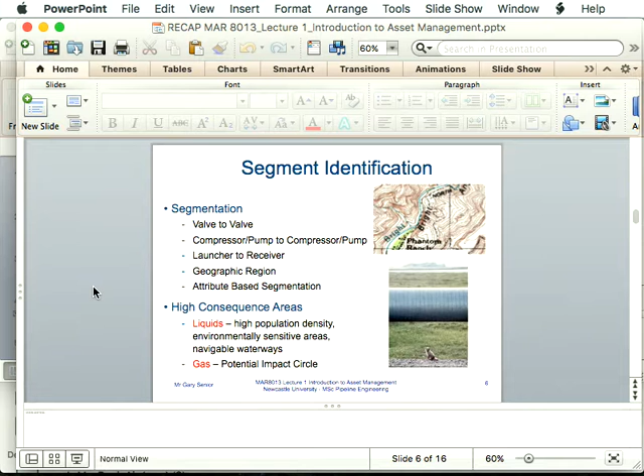We talked about segment identification. Remember, at the first stage of the process, can you remember a couple of principles on segment identification? What would we use? Rules? How would we generally segment a pipeline, for example? Geography. Geography, yeah. Valve points, pig traps, changes in fundamental parameters such as wall thickness, grade, diameter, that sort of thing. And that's one of the first steps in the integrity management process, remember, segmentation of the pipeline system. So we talked about that quite a bit.

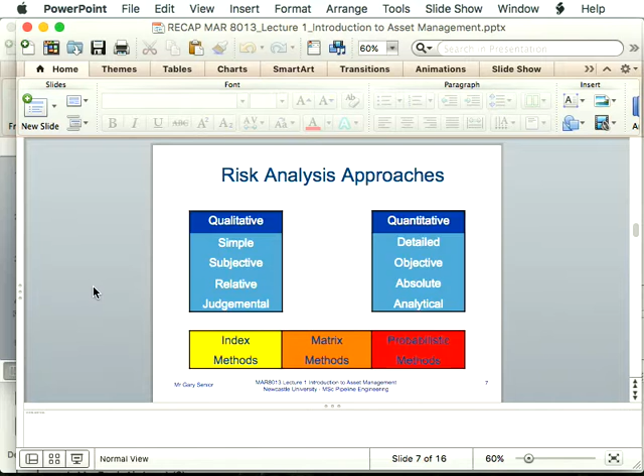We talked about risk analysis then, the three different concepts. Simple to the left, very hard on the right. Our qualitative, very simple approach. Remember, that was our pipelines on the diagram, where we had small diameter, thick wall thickness, that's low risk; high diameter, high pressure, thin wall, that's high risk. So simple risk ranking techniques. Then we have the index or the semi-quantified approach in the middle, and then the full quantified on the end. So this is our example. Remember, we went through this last week, so I won't go through it again.

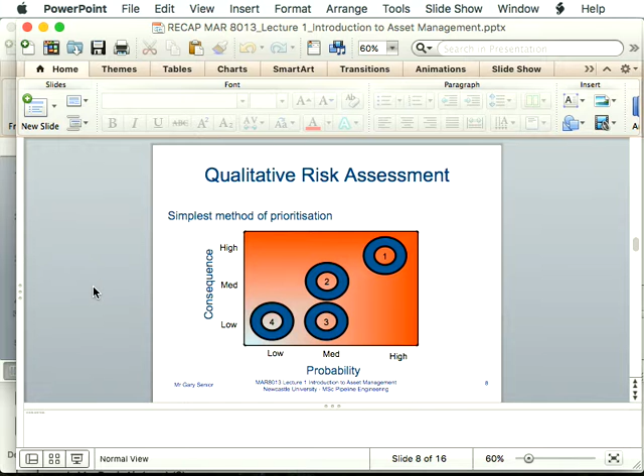It allows you to risk rank the relative risk of different pipelines in your operating company. And a lot of companies do this to identify which pipelines are the highest risk elements of the system in total. Therefore, they are the ones where you use time and money to measure and quantify the risk more accurately. If they're very low risk, you don't need to quantify the risk. If it's high risk, you do need to quantify it. So that's our simple method. Remember, qualitative, being opposite to quantified.

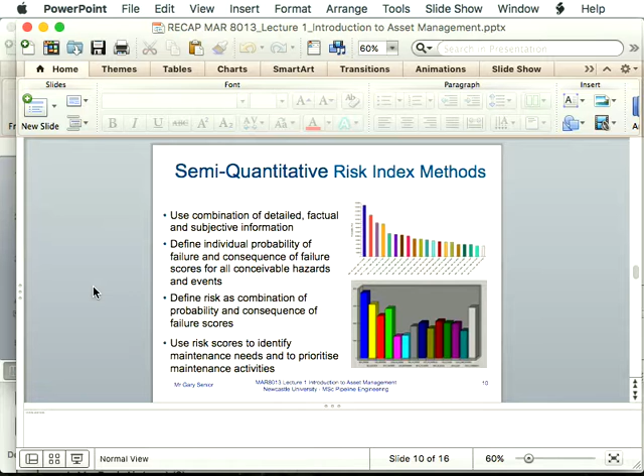So then we had our semi-quantified, in the middle, where we come up with these sorts of graphs that I won't go through again. The semi-quantified approach allows us to put different factors. So we have a semi-quantification of the integrity of the pipeline, applying different point scoring for the quality of the coating system, the effectiveness of the CP, ground stability, these sorts of factors, and then we come up with these very nice flashy charts, risk ranking pipelines with a numerical number associated. They're not absolute numbers, but they're semi-quantified. So it's a halfway stage between simple risk ranking and very complex quantified analysis. So that's our middle method.

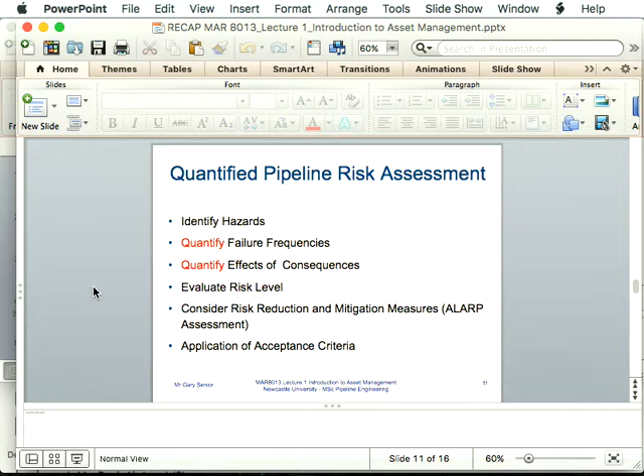We then get to the very complex quantified approach, which is generally for high hazardous locations. So the nuclear industry uses this sort of approach. Pipeline operators use it where their pipelines come close to very highly populated areas. For example, they would use a quantified approach to demonstrate that the risks they're exposing the public to are acceptable, or ALARP. Everyone remember what ALARP is? A-L-A-R-P? As low as reasonably practicable. Yep, and it's a good concept just to have in your mind. So that's a quantified approach.

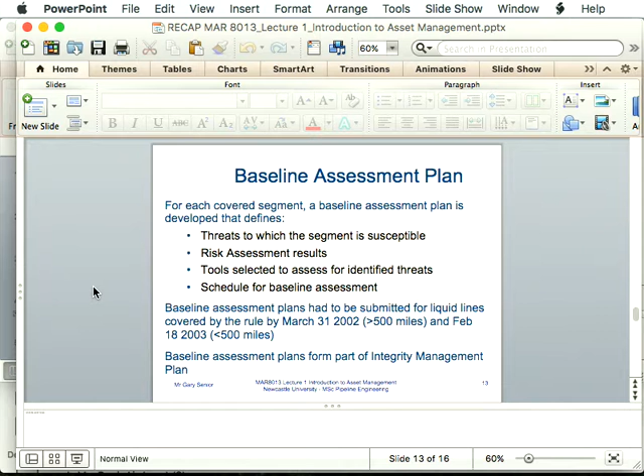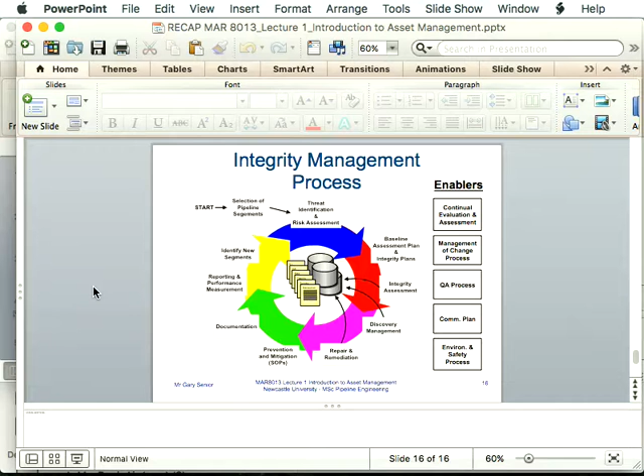So we did the segmentation, threat identification, assessing risk, baseline plan, and then into integrity plans. And now we're up to the integrity assessment stage, which is on the red part of the diagram there at the 3 o'clock position. Okay, so that's a recap from last week. Anyone have any immediate questions on any of that? Everyone okay? Good. Right, so that's a recap.

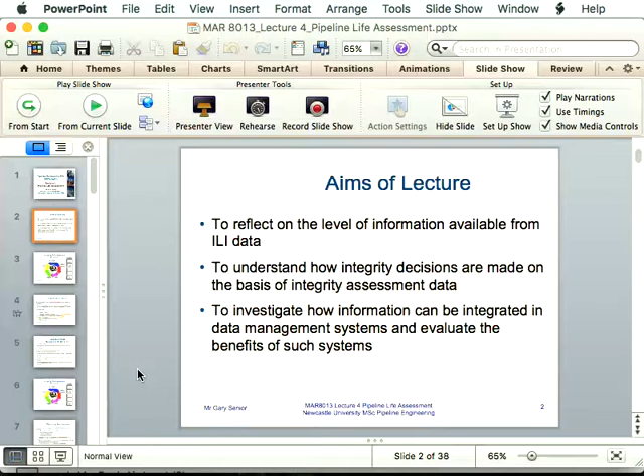And how we integrate the information together, I'll get onto as well. Okay, so we're going to go into integrity assessment, which is, as I say, the red part of the diagram there.

So before we start trying to predict what the integrity is going to be in the future, assessing the life, we need to understand it now. We spoke about inline inspections, so there are tools and techniques available for measuring defects in the pipeline and categorizing them, sizing them, their significance, that sort of thing. There are above-ground techniques too; lots of different techniques available. We select based on pipeline attributes such as wall thickness, grade or whatever, and inline inspection.

I'm not going to talk too much about inline inspection because you've got other presentations on it, but inline inspection techniques cover a whole range of different technologies and physics phenomena, from ultrasonics to magnetic flux fields, acoustic resonance fields. There's all sorts of clever physics used on inline inspection tools, and you use them depending on what you're looking for.

If you're looking for cracks, or what are sometimes called planar defects, you need certain types of tools. If you're looking for general metal loss, which is corrosion, gouges, you have a different technique. For dents as well, if you want to size dents, slightly different technologies. So it depends what you consider a threat, then you assign the technology to the threat and use it. So in terms of techniques, we've got inline inspection. I've done the first one there.

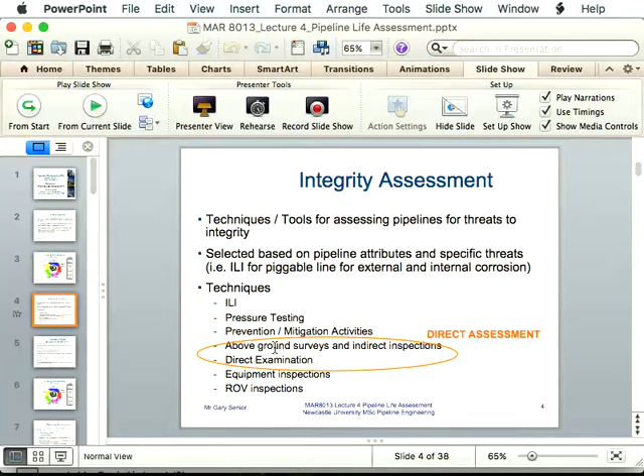Okay, so there's different ways, different technologies and techniques we have at our disposal as pipeline engineers, but we need to align those technologies or map them to the threats on the pipeline. So you only apply a technology based on appropriate threat. Obviously, you need to be using the right tool to measure the threat that you perceive there is for the pipeline. So B31.8S, which is, remember, the ASME document that lists a whole host of pipeline threats, etc. And we'll just go through them fairly quickly.

But first one is third-party damage. So, in terms of third-party damage, I'm sure you've heard that term quite a lot. And does anybody know what first and second-party damage are? So first party is, sorry? The owner. The operator, yeah. First party damage is the embarrassing one where the operator has done it themselves. Okay, and that shouldn't really happen ever, but it does. They'll hit their own pipeline or they'll do whatever. But that's first party damage.

Second party damage, what would that be? The company is allowed to work in the pipeline? Yeah, a contractor. So we have company A at the top, and he employs company B. So he is working under the operator's instruction, so he's second party, he's not a random third party. So he should be working on a permit system, etc., and he causes damage. And then third party is the total external, so it's another utility, or it's somebody doing a development of property or whatever, and he just takes out his JCB and he hits your pipeline, etc.

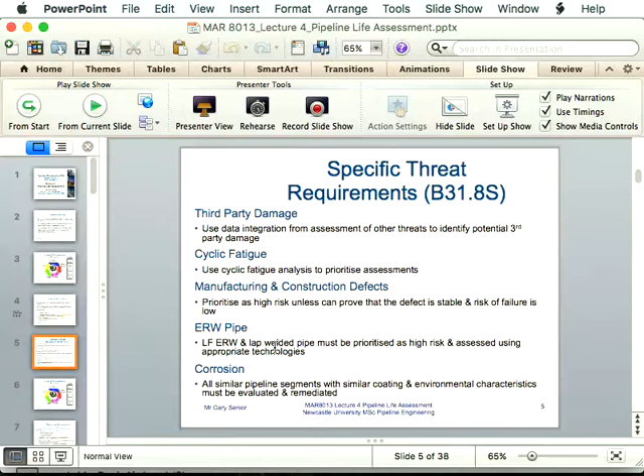So we did a little bit on the integrity assessment and different techniques. But we'll now just go into discovery management. So we can use all different techniques to identify features, defects, cracks, corrosion, dents or whatever. And then the question is, well, what do you do about it? You found it, so what do you do next? And that's this discovery management element.

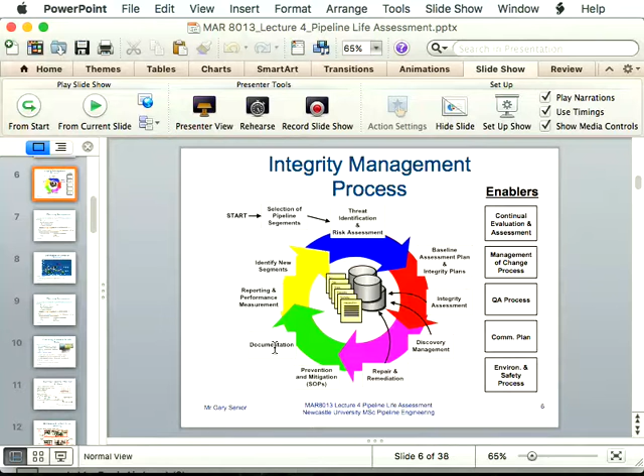So we need rules for once you find a feature, a defect or whatever. How do you manage the whole process of assessing its significance, and how do you move forward with it, if you like? So operators will have prescriptive rules, for example, such that if defects are above a certain size, they will just repair them immediately.

Okay, and you've got there typically 50%. So for example, if you find corrosion half the wall thickness, then the operator, in their management procedure, would repair that automatically. But if we've got a 10mm wall thickness pipe that is 900mm diameter, and you find 5mm deep corrosion in there, which is, let's say, this long by that, is that an immediate integrity threat to that pipeline system, do you think?

Or for you to make that decision, what questions would you ask me? So if I'm the person in the trench, I've got my mobile phone here, what else do you want to know from me? So it's 5mm deep, it's about this long, that wide if you like. What other information do you want to understand how to assess its integrity?

Direction, the shape. Yeah, direction, so longitudinal or circumferential. Well, why is that quite important? So like the type of stress in the two directions. Is it the high stress in the two directions?

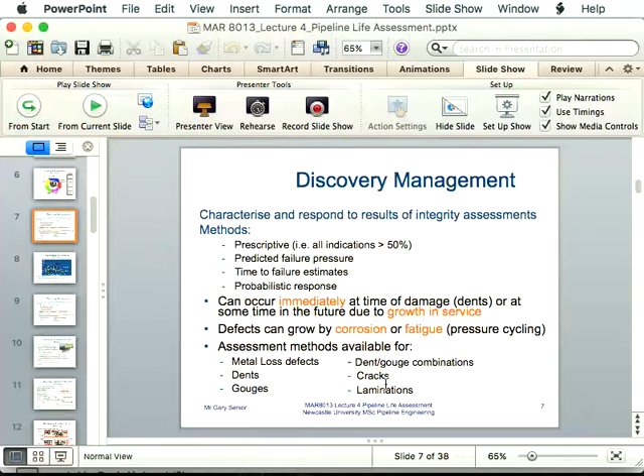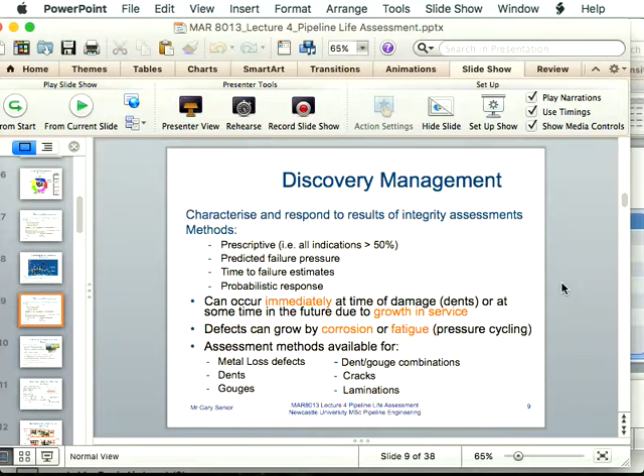So we then get into the really hard and clever part of the analysis, which is trying to estimate corrosion growth rates. Okay, and we spoke about it a little bit earlier. What rate will it go? Is it 2 millimeters per year? Is it 1.1 or whatever? And that's obviously a huge variable that's very sensitive, obviously, for the life of the asset.

So there's lots of worst cases, and there's lots of models out there in theoretical studies and published papers. So these guys there, De Waard and Milliams, who are Dutch and Belgian, they've done a lot of lab tests on corrosion of plate steels, etc., and come up with upper and lower confidence bounds for different steels, different ground conditions, and all of that sort of thing. So there's lots of theoretical data to help the operator or the analyst to predict at what rate the corrosion will grow.

You can actually look at measuring online, trying to establish real corrosion rates, with weight loss coupons or probes. So this is generally for the likes of liquid hydrocarbon lines, the likes with H2S and that sort of thing, sour gas type systems, so very aggressive. So what the operator will do is insert a coupon in the pipeline in the product flow, and they will wait. And they will keep bringing it out and weighing it over a period of time, and measure the mass, and the reduction in mass is the ions moving off the coupon into the product material.

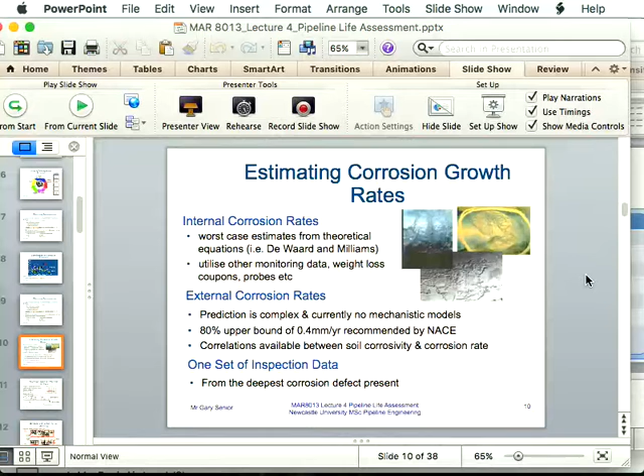Okay, so is that okay on estimating corrosion rates, etc.? Right, okay. So just following on a bit from that, so we've got ILI data. Has anyone seen inline inspection data for real? Yeah? Have you seen it outside of here? Have you seen it in a company before? Yeah? There's a couple of guys nodding that they've seen it, where they'll have all the different ILI vendors or sellers, if you like. There's GE, General Electric, there's Rosen, several different outfits out there. They all have slightly different approaches to presenting the data and how they analyse it, etc.

But you need to understand the difficulty of what they're trying to do, because the inline inspection tools aren't directly measuring defect sizes, okay? So it's not like if we had a pipe section in here with some corrosion and we get a ruler or whatever and we can measure it, that's direct measurement. What the inline inspection companies are doing, they're using changes in physics to interpret what defect sizes are. And you'll have heard from the ILI presentation if you've had all of it yet. They're doing things like putting a flux field through the wall, and they're trying to correlate a flux field distorting to what it means for a defect.

Or they're sending an ultrasonic through the wall, or they're bouncing a high frequency signal through the material, bouncing it and bringing it back, and trying to work out the speed of that signal coming back and how it's changed the profile of it, the amplitude, and what that means for a defect. So what they're doing is incredibly difficult, which is why it isn't an absolute science.

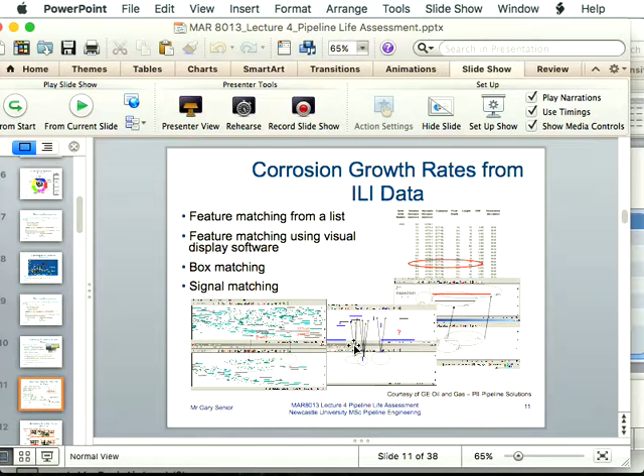So the problem that operators have, which you'll see at some point probably: when you use a basic ILI tool or a lower technology from 10 years ago, then you use a high-tech tool now, how do you compare the two data sets to understand what's happening with the corrosion rate? And that causes monumental issues for operators. Even if they stay with the same vendor, trying to understand how the pipeline is degrading between two runs.

So how do they box off corrosion features and then size them, etc. And it's just a continued problem to try to come up with real quantified information to understand what the corrosion is now, but how do you compare with what it was 5 years ago or whatever. And then even more difficult, what it's going to be like in 5 years' time, which is the corrosion growth rate issue to get into.

Yeah, sure. How would you deal with a situation where the vendor has come in with new technologies for running the tool, and maybe you scanned your pipeline 10 years ago using old technology, and now after 10 years you're moving to the new technology? But remember, there is that marketing aspect that is associated with vendors. So the new technology would cost you more, but also the integrity of the data would be in question. So how would you deal with such a situation?

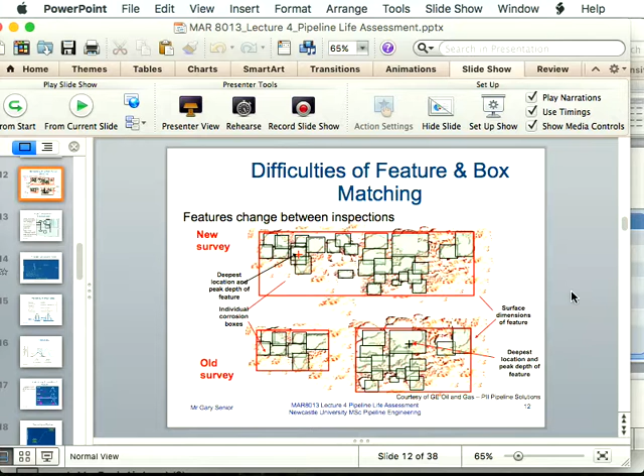Okay, so this is just an idea of the point you were just asking about, old data, new data. We've got the data set here where we've got a certain corrosion feature that's identified, and it changes in shape. It doesn't show much change here, but what the ILI company is doing is trying to find common features on the previous run that they can compare with theirs, and that allows them to calibrate the new data, if you like. So they're looking for matching points across.

This is what this is doing, so that they can then analyse other features that have been identified perhaps in the first run. So they try to correlate data points, but just bear in mind they are trying to match electronic signal data, not real feature data. That's the difficulty. So it's incredibly difficult to do, but they're getting better and better at it every year.

Okay, and then we get into all of the fun of probabilistic analysis. So we'll go from deterministic to probabilistic. Some of you guys might have done probabilistic structural analysis. I don't know if you are into that side of it, but obviously deterministic analysis is purely looking at: I know what this metal loss feature is. It's 25 millimeters long, 6 millimeters wide, 8 millimeters deep, and I know what the material grade is, blah blah.

And the deterministic is that they're all fixed inputs in the analysis, so they're not variables. You have 100% confidence on all of those data points, so you're not going to apply any variability to it. But the probabilistic approach is that it has a level of uncertainty over the reading, because bearing in mind the reading they're giving you isn't absolute. It may appear an absolute value, but there's a variability associated with it. So for example, they may have high confidence on the length, but for a given defect it has a variation in depth associated with it.

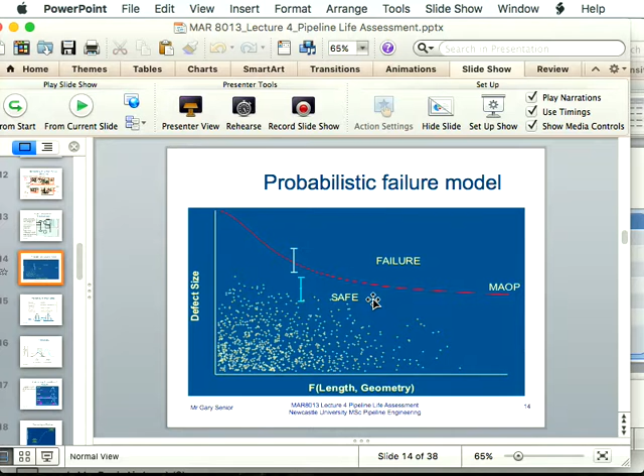So what the probabilistic analysis will do is apply variability on all of the inputs that go into the calculation for assessing the fitness for purpose of the defect, and it uses what's called Monte Carlo simulation. Anybody done that or heard of it? Just like the casino in the south of France, Monaco, yeah, that's the place. So Monte Carlo simulation is full probabilistic.

So what it's doing is millions of permutations of data points together, and it runs them in a random Monte Carlo type simulator. So it will use all of the variable values for each of the parameters, and then it will come up with a probability of a defect failing or not based on all of the variability of the inputs. So it will have a distribution for wall thickness, because if we have a standard wall thickness of say 12.7, that's a deterministic value. Is the actual value going to be exactly 12.7, do you think?

What do you reckon? What's the thinnest you would expect if it was 12.7 nominal? How thin do you think it would go underneath that? Half millimeter. About a half mil. Yeah. So if it's 12.7, it could be 12.2 maybe? You could go down that, yeah. And then in terms of thickness the other way, how much over possibly? You tend to get less variability over because they supply line pipe by weight, so they try to keep it down. But typically, tolerances on line pipe wall thickness are around 5%.

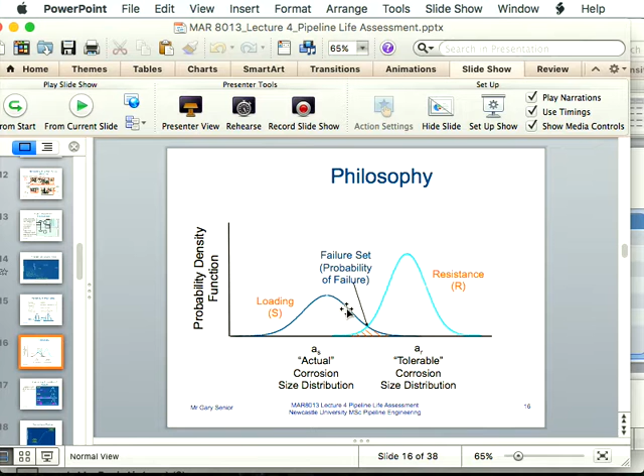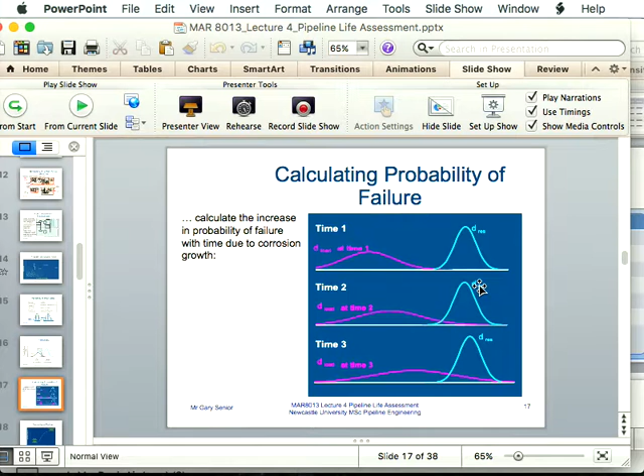So if the operators are doing an analysis using ILI data to predict future life of their asset, this is the sort of analysis that they would do, which is incredibly complex, which is really the principles for you to understand, if you like.

And then, the previous slide comes up with probabilities of failure, but the question is, is that acceptable or isn't it? What's the target level of probability that's acceptable or not? So where is the line when something is acceptable or not? And typically DNV issue a lot of rules for this for offshore that's used onshore. So they have simple rules about probabilities for acceptability of failure. So they'll allow higher likelihood of occurrences if there's no human activity around, in that they're more tolerant to a failure occurring if there's nobody around, but if there are people around then it's 10 to the minus 5. So you can then back calculate on here as to where you are on that line, and therefore how long it will take you to get to the unacceptable position.

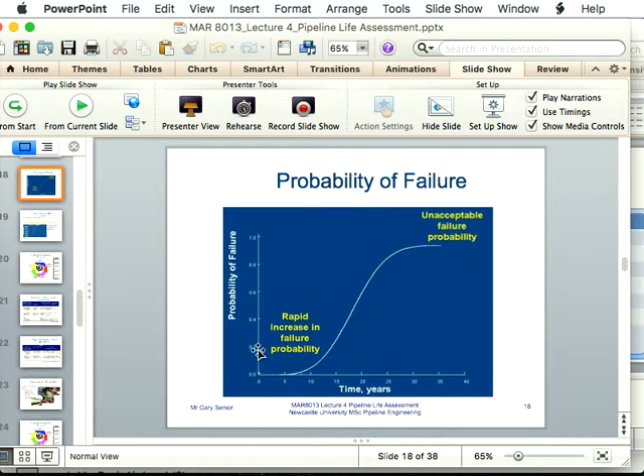So this then calculates the remaining life. So your risk level is here, and you're going to be growing, and you're going to get to this point when you hit an unacceptable risk level, and how long it takes to get you from A to B. So a lot of that's quite detailed on the discovery side, but it was particularly relevant on the ILI data, using data probabilistically, looking at the defect geometry, its size, and the material properties, applying distributions to all of those inputs, and then probabilistically calculating the future life by applying a growth rate to it. Okay?

So I've got another 10 minutes of talking here, and then I'll put the video on. So we then get into response times with repair, which is on the, whatever colour that is, I don't know. And I think did Will Sharman maybe talk to you about repair? Or somebody spoke to you about repair, yeah.

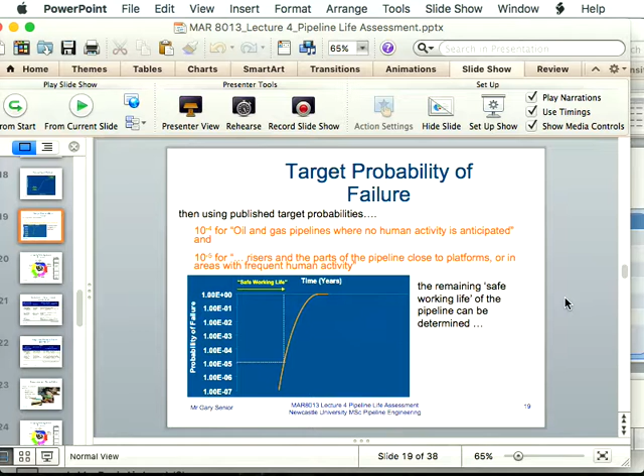So what that's saying is that we found a defect that in our theory we think would fail below the MAOP. So if I go quickly back, it's up here. Basically that's what it is up there, yeah? And it may not have failed at the moment because you're operating below the MOP, for example. So it may have a 70 bar MAOP, but you're only running at 50 bar, and the predicted failure pressure is 60 bar. So the CFR regs say that requires an immediate repair.

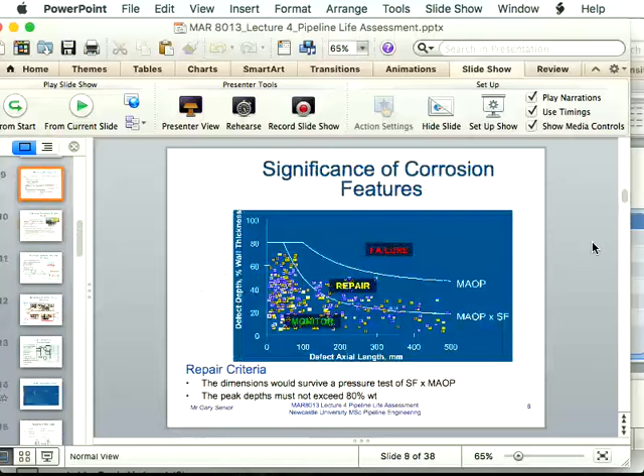Metal loss greater than 80% needs immediate repair, which is your point before about deep defects. It then talks about dents and when they need to be repaired immediately or whether they can be repaired later. So they distinguish by the clock position. So dents between 4 and 8 on the top, on the crown, need to be immediately repaired, but if one's on the bottom half, it suggests they are less important. So why would it say that?

So when they laid it in the trench, there was a hard spot in the trench. They laid the pipeline and it dented it. So it's highly likely that dent would have been subject to the hydro test. So unless something's changed with the dent, it would still be acceptable.

If you've got dents on the top of the pipeline or the top quadrant, maybe between 2 o'clock and 10 o'clock, that top quadrant there, then it's more likely that would have occurred during the operational life. So somebody's hit the pipeline, quite possibly after the hydro test. Okay? So they could have cracks associated with it, etc. So that's why they distinguish between the clock position.

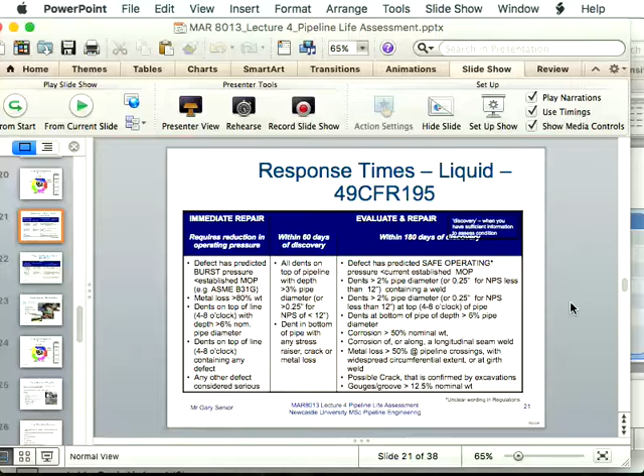Okay, so I won't go through them because it's similar points to before. It's just again trying to differentiate between different defect types and how long you've got to repair. And there's different repairs. I'm not going to talk about the repair because I think you've had the chat on it already: welded, epoxy, clock spring. There's a whole plethora of techniques out there.

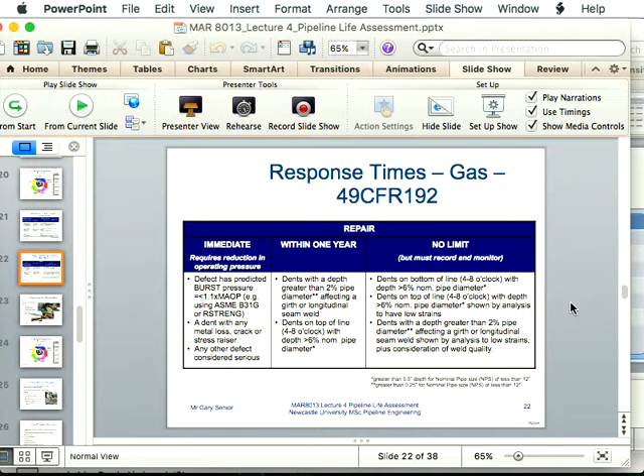And ultimately pipe replacement. So pipe replacement is mega cost, permanent solution; grinding, very cheap for light damage, superficial damage if you like; composite sleeves and welded sleeves, medium cost, that can repair a wide range of defects; and then repair clamps or what's called leak clamps. So that's an epoxy, and somebody else has spoken about it already, I would guess. That's clock spring. That's a patch, which people generally don't use too much, to be honest. Or you grind as well.

So once they've got the defect according to this process, you then repair it. Any questions on that? I can't talk about repair, but I think you've heard it already. So we then got through discovery, repair and remediation, and we then get into prevention and mitigation. So we're in the green section here, 7 o'clock or whatever.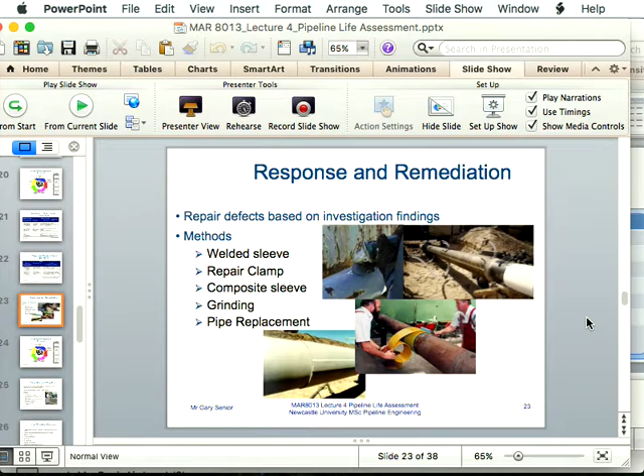So we're looking to prevent the threats materializing and mitigating the consequence of them, and taking actions to keep it in check. So for example, if internal corrosion has been identified as a dominant threat to the pipeline, then how do we mitigate the likelihood of internal corrosion occurring? We can't just stop production, so it's going to be flowing through the pipeline. But we can use inhibitors.

Anybody come across inhibitors before? Scavengers, all that sort of thing. So you can put chemicals in the product that reduce the activity of the so-called bugs, chemical bugs that are in the product that are causing the corrosion. It's a bit analogous to your immune system in your body, if you like. There are corrosive agents in the product causing corrosion, so you put inhibitors to neutralize or take out the effect of that.

The other thing is to do on-stream cleaning. For very aggressive pipelines where there have been real internal corrosion problems, they may clean the pipeline every 3 months. Okay? So they'll swab it with pigs and put cleaning agents in there, fully clean it, scrape the internal surface, take out all of the old product, and they'll do that every 3 months if they get wax build up and all these sorts of things.

So quite drastic actions. Or if there is corrosion going on, then we can turn up the cathodic protection system, so we can put more current into the pipeline to keep the cathode and anode balanced correctly, so that it doesn't lose ions to the environment. Or you can recoat.

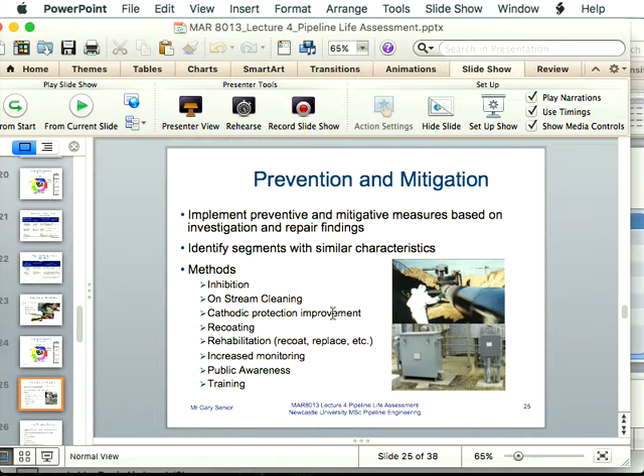So general risk mitigation of the pipelines: increasing the wall thickness. Again, we spoke about that in the first lecture as well, that if you increase the wall thickness, you increase the resistance to external interference, and it buys you more corrosion life, if you like. Even if you've got internal corrosion, you've got a thicker pipe, then obviously it can last you longer as well. And it's this 30% rule that we'll talk about as well.

Higher material grade reduces the chance of a rupture. Why would that be? So if we have X52 in our pipeline with whatever pressure and wall thickness it is, it doesn't matter. But if we replaced it with X65, why would that reduce the chance of a rupture? Why? It's got a higher strength, yeah. It's got a higher strength, but why does that reduce the chance of a rupture?

So with X52, if you're operating at 50% SMYS, if you increase from X52 to X65, then you will be operating at 52 divided by 65 times 50, which would be 40-something percent SMYS. And the lower the SMYS, the lower chance of rupture. Yeah? Okay. So if rupture is the real concern, use higher grade material.

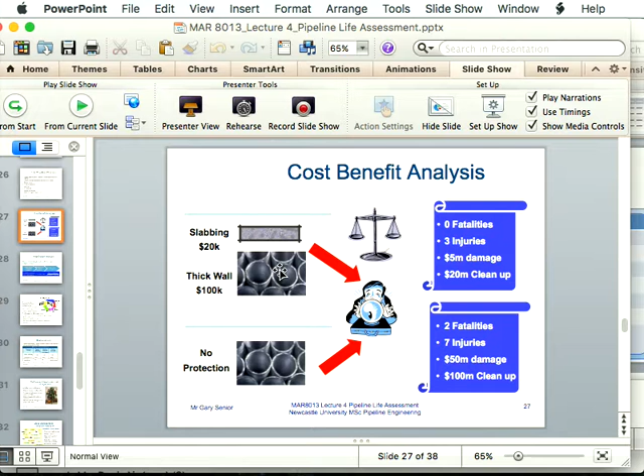So in the case of slabbing, what would the consequences be without the slabbing, the cost after, and then you compare. And then it becomes a pure financial argument. Do you leave it as it is? Do you use an intermediate cost solution or a high cost solution, or do you relay the pipeline or whatever? So these techniques allow operators to justify how much they spend to the board, etc., to manage the risk level.

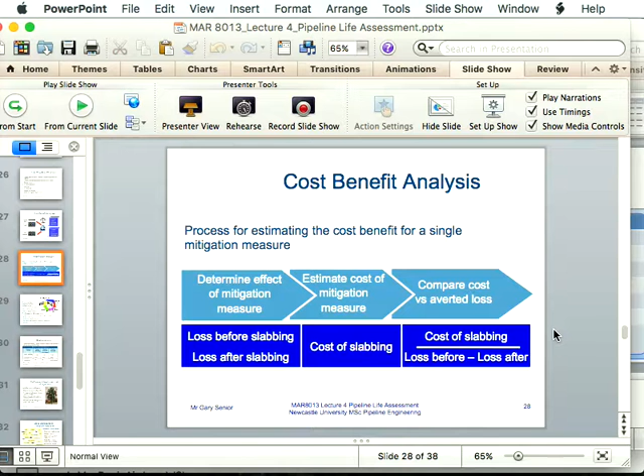And then just a couple of slides just to finish off, and then I'll quickly put a video clip on. Documentation is critical. Regulators tend to be quite aggressive in terms of documentation and wanting organisations to have electronic documentation systems where they integrate all the information together rather than just having it spread all over, disparate in some system, etc. So trying to get the documentation in one place to have feedback results into the system, keep knowledge in the system so if people move on, information doesn't get lost with them. So electronic documentation systems are an effective part of this process.

And then measure the performance of the system, because this is an integrity management system. So the question is, how is it performing? Is it delivering what you want? Can it be improved, etc.? So operators will come up with performance measures for how they're doing. Sometimes they'll call them KPIs, key performance indicators, or safety indicators, something like that.

So they'll come up with some metrics to determine their performance so that they can judge if their integrity management system is being effective. So they look at incident rates, release rates, infringements, encroachments, that sort of thing. And the financial benefit of the integrity system. Is it delivering what it wanted to do, or what it should have done, or can they do anything better, improve it, that sort of thing.

So if we've got the system in place, but they're still having 10 incidents a year, then quite obviously something isn't going right in the whole process. So if you're measuring performance, then you start the loop again, and then you continue, go through it and refine it and optimize it.

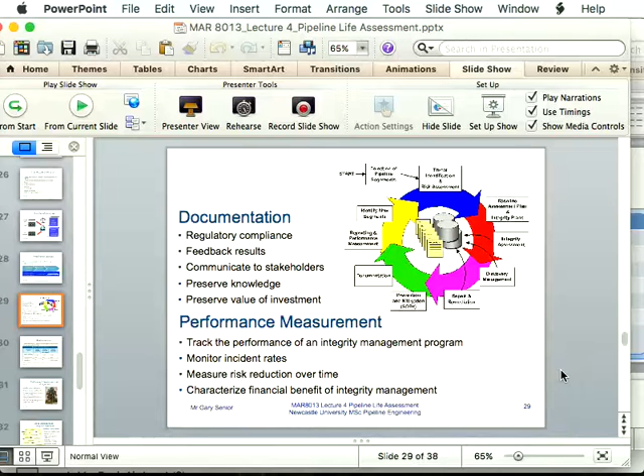So the regulations are giving guidance to the operator as to what they consider is good practice for how often you would do these major activities like inline inspection. So that would be the starting point for the operator. They could do it more frequently if they wanted, but that's the starting point for them.

And this is just the 2 slides to finish now. So on historical approaches to data management, as I say, there used to be huge ranges of different paper systems, electronic systems, and all sorts, and data just didn't come together, which was a whole huge problem for operators previously, and it still is quite a challenge with some now, to be honest.

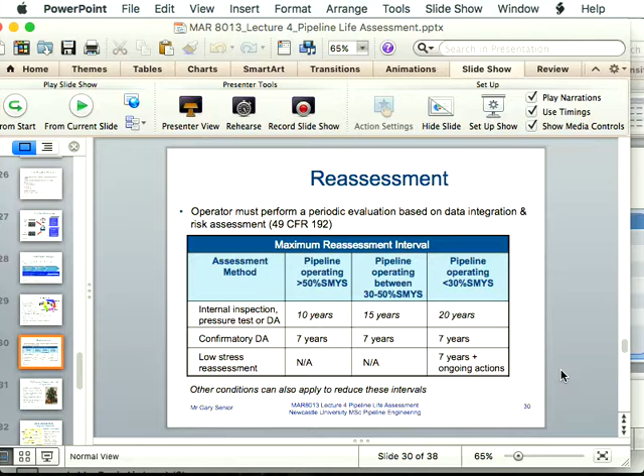So if your pipeline happens to go past a large hospital or a school, and remember we treat hospitals and schools quite differently from a pipeline routing point of view, purely because they're more vulnerable. Okay, so they have more vulnerability. So if a pipeline failure occurs near a hospital, they can't evacuate a hospital with the same speed as this building, that sort of thing. And schools are the same as well.

And prisons are treated the same as well, actually, because they can't naturally flee the prison. Well, generally they can't anyway. So certain types of buildings are treated differently because they're less able to act as the general public would. So special locations like that and perhaps environmentally sensitive areas could be overlaid on the system as well.

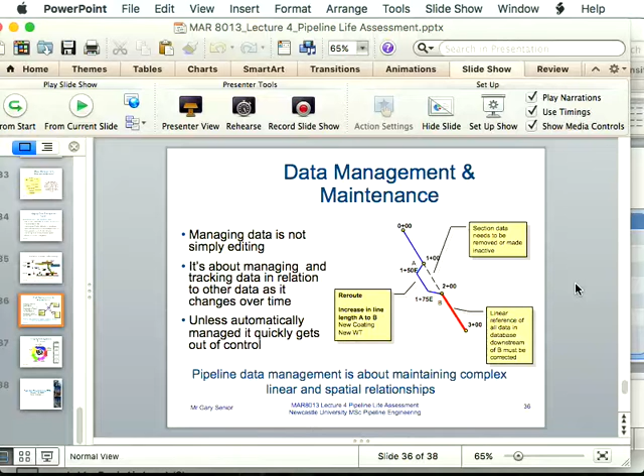frequency they run it. So when you're going through all of this info afterwards, probably the day before the exam I'd imagine, just start with this diagram, understand the individual sectors or segments, understand how they interrelate with each other, the concept, and then understand risk and the different approaches, the simple to the difficult type, understand those ideas, how to manage corrosion and to predict the life of an asset with corrosion rates, all of that sort of thing.

Okay, so I've just got this video to stick on. Before I stick it on, does anybody have any final questions on any of this that I've covered? Everyone happy? All crystal clear, right? Yeah? Good. Right, I'm just going to stick this on.

I normally put this in at the end of the lecture because I'm fortunate in that I've worked on pipeline projects when they've been getting built. So you see a lot of that stuff. And obviously a lot of people don't, so they get into pipeline operating companies or positions and they've never seen a pipeline, and generally you don't see them because they're buried. You shouldn't be seeing them anyway. But I think it's quite informative as an appreciation to understand how they get constructed and what goes on, and it varies a bit around the world.

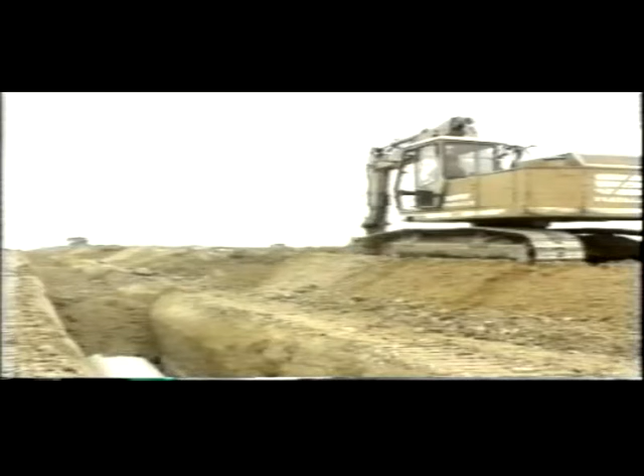So this was about 20 years ago, when they were building the pipeline in the south of England. It's going to have a bit of explanation in a second. This is just an intro. It'll start showing how the pipeline's laid out, the ground level, then it's trenched, and then the pipeline gets laid in there, welded, and then pressure tested and all that sort of thing. And that's a compressor station there. Is it a manned compressor station? They're not manned nowadays. They used to be when this was made.

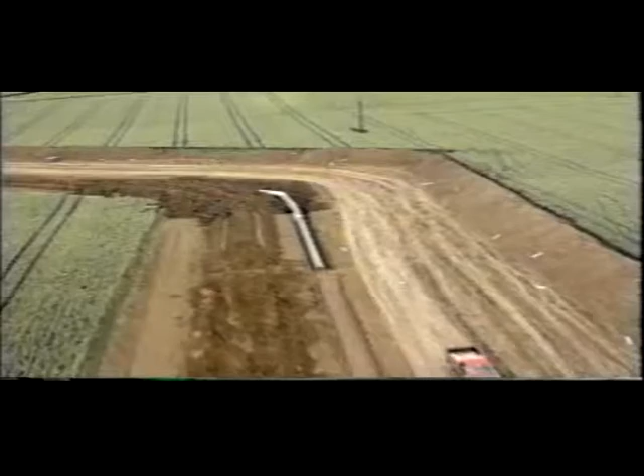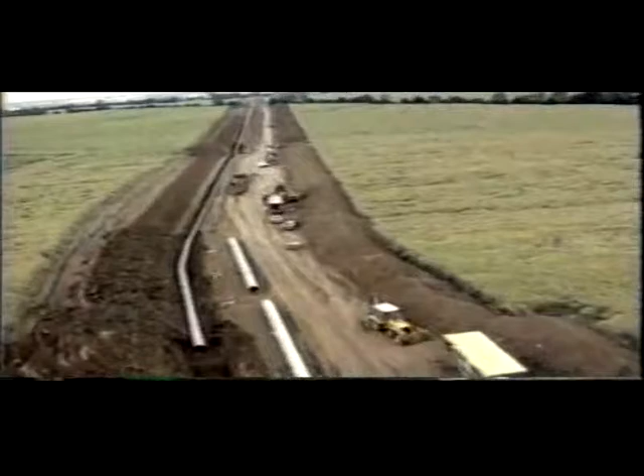Of only 17 weeks. The 25 separate operations of the spread encountered the crossing of 31 main roads, 2 major railway routes, and crossed the M11 motorway twice. But despite these many obstacles, they still averaged in excess of 1 kilometre a day for the individual operations. Here we can already see the team's activity in preparing the site.